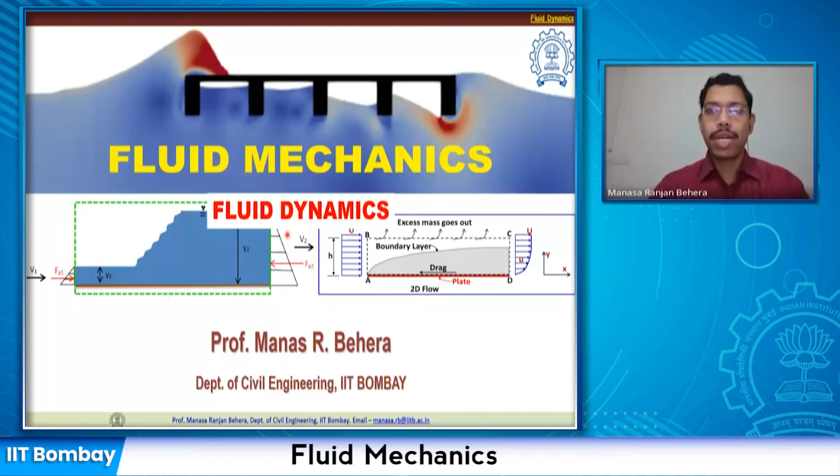So in the last lecture of fluid dynamics, we discussed various aspects of Reynolds transport theorem. We derived how it is linking the system and control volume approach, as well as we also discussed the linear momentum equation that has been derived based on the linear Reynolds transport theorem, and we also saw various applications of the linear momentum equation. So in today's lecture, we will see equation of motion for real and ideal fluids. We'll also see Bernoulli's equation and how it is applied to various problems.

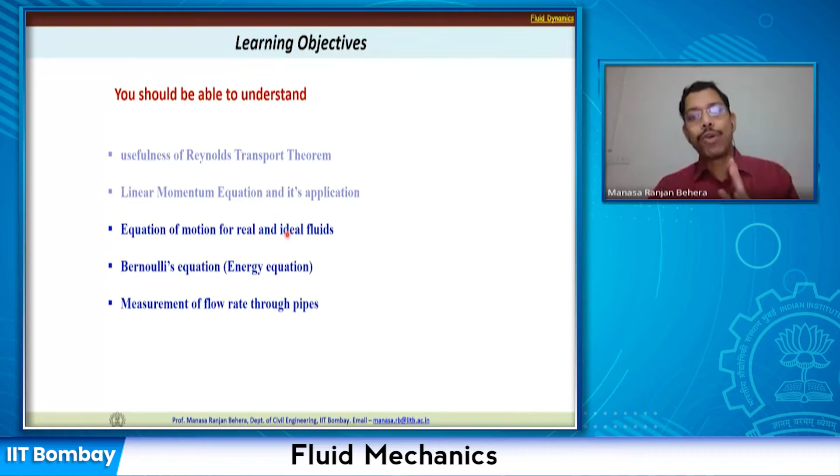Now, when we talk about equation of motion, basically it is the law of motion. So the moment we talk about law of motion, we remember Newton's second law, which says that force is equal to mass into acceleration. We have already seen how the total acceleration is derived based on temporal as well as convective accelerations. Now mass is the mass of the particle or the fluid element.

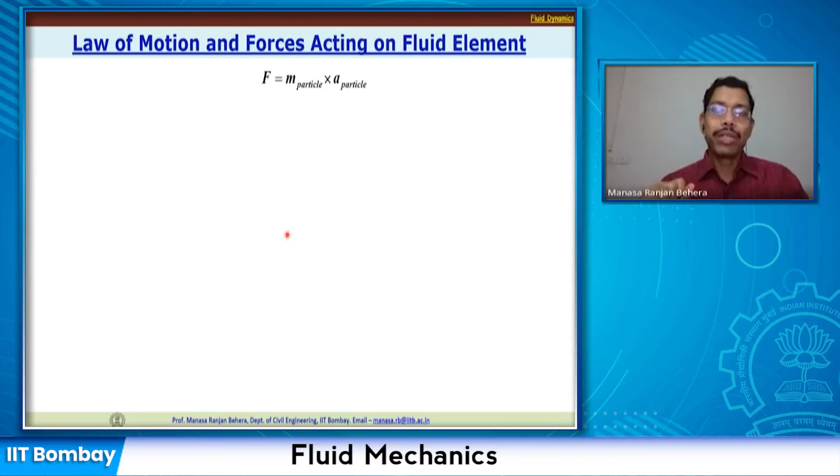Now what are the different forces that are going to act on the fluid element? If we look at the forces that are influencing the motion, the major forces that are going to act are gravity or the body force. Then there is a pressure force, which is fluid pressure. Then there is molecular viscosity or the viscous force. We have already seen how the viscous force acts, and tau is equal to mu du by dy, so viscosity is going to play a major role.

In addition to that, there is a surface tension force which is going to act. Due to compressibility, there will be some force. When there is turbulence, there will be Reynolds stress generated, and that is also going to act on the fluid motion. So all these 6 different forces can be broadly classified into 2 categories: body force or surface force. Those acting within the body we take as body force. If something is acting on the surface, we call it a surface force.

Now among these 6 different forces that we have listed here, we are not going to consider some of the forces right now, because right now we are not talking about turbulence. So right now we will not consider the Reynolds stress. It will come only when we talk about turbulence. So the effect of turbulence is not in picture right now.

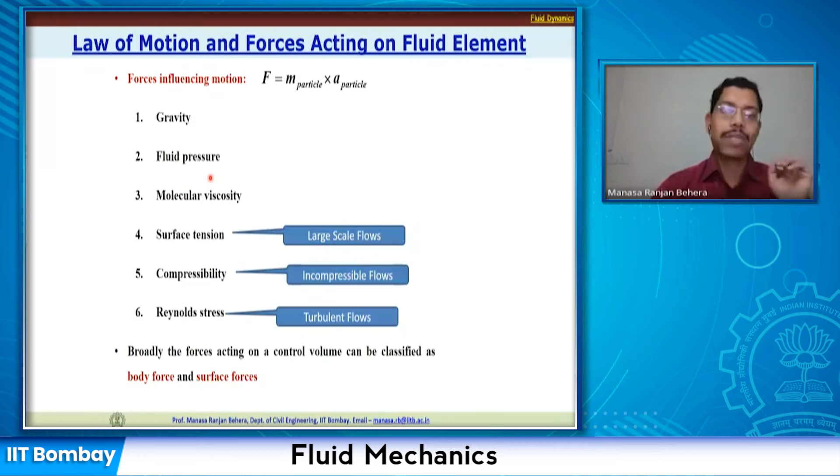Okay, now let us look at these forces. Let us take a fluid element first, having dimensions dx, dy and dz. This fluid element is going to have all these forces acting on it. As we have already discussed, there is the gravity force, that is the weight of this fluid element. If we take vertically downwards, the weight acts vertically downwards. So volume multiplied by unit weight will give you the weight of the fluid element.

Now what is the next force? There is a pressure force which is acting on the surface. Here you can see I have shown Px, which is acting in the x direction. The pressure is acting on this face, which is nothing but dy dz, and there is a pressure Px acting on the left side of the face.

Similarly, on the opposite side there will also be a pressure acting. If that pressure is Px here, over a distance the pressure would have changed, and the rate of change is dou Px by dou x. So over a distance dx, the change is dou Px by dou x multiplied by dx. So Px plus this component is the pressure which will act on this surface. Now, I think there is a mistake here. The pressure should be acting towards the fluid element.

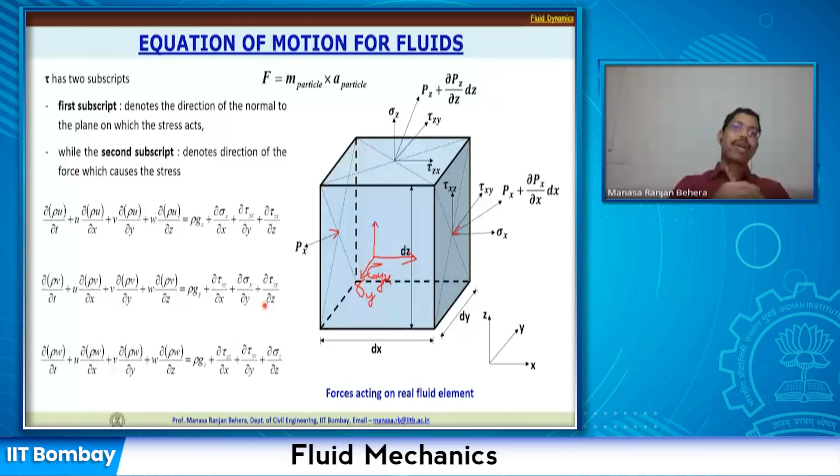So we have 9 unknowns, and you know that you need to have as many equations as the number of unknowns that you have. So if you have 9 unknowns, you need 9 equations, but we have three equations. So if we can convert or represent these unknown terms in terms of u, v and w, then our problem will be simplified. We can reduce the number of unknowns. So that's what we are doing here.

We have this tau that is represented in terms of u and v. Similarly, sigma is represented in terms of pressure as well as velocities. So now these 6 unknowns we have represented using 4 unknowns. So already 3 unknowns, same u, v, w. So additional 1 unknown is still remaining, that is pressure. So right now altogether in the equation we have 4 unknowns, u, v, w and pressure.

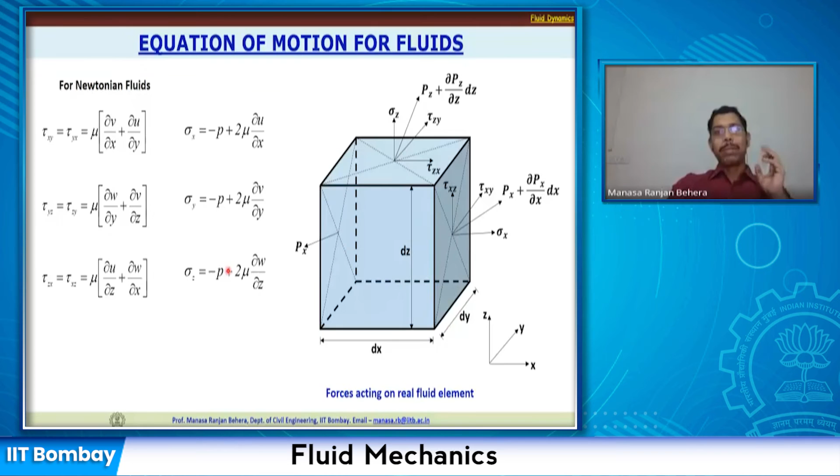So now let us write down this new equation, substituting these values of tau as well as sigma. Okay, so this is my equation in the x direction. I have written the equation in x direction. Let us look at that.

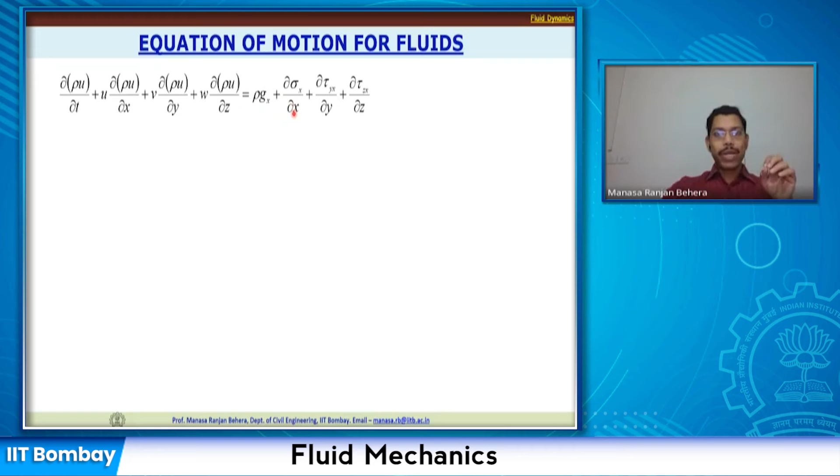So we had this equation, that is dou rho u by dou t plus u dou rho u by dou x plus v dou rho u by dou y plus w dou rho u by dou z, that is equal to rho gx plus dou sigma x by dou x plus dou tau yx by dou y plus dou tau zx by dou z. Now in this, let us just pull those equations which we had already written for the tau as well as sigma.

Now if I take the first term, that is sigma, I can write down sigma x equals minus p plus 2 mu dou u by dou x. Similarly, I can substitute the value for tau yx and I will take that from here, and again for tau zx I'll take the value from here. Alright, so let us write down. I'm not writing the left hand side, I'm going to write only the right hand side and see how we can rewrite the equation.

So if we look at, you have this rho gx here. Now if you substitute sigma x in terms of minus p plus 2 mu dou u by dou x, you can write down minus dou p by dou x plus 2 mu dou square u by dou x square. Alright. Now similarly, let us substitute the term tau yx. What is tau yx or xy? That is mu times dou v by dou x plus dou u by dou y.

Now if I substitute mu dou v by dou x into dou by dou y, I get mu dou square v by dou x dou y plus mu dou square u by dou y square. So now by substituting tau zx, I can write down mu dou square u by dou z square plus mu dou square w by dou z dou x. Okay, so this is the modified equation that we have now.

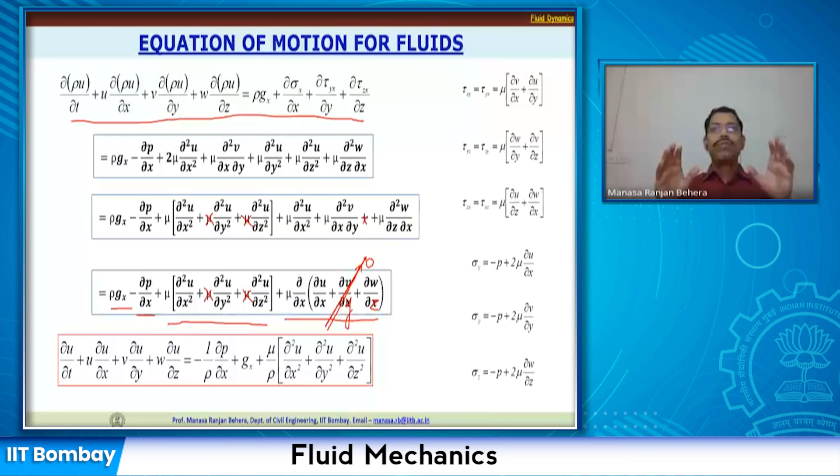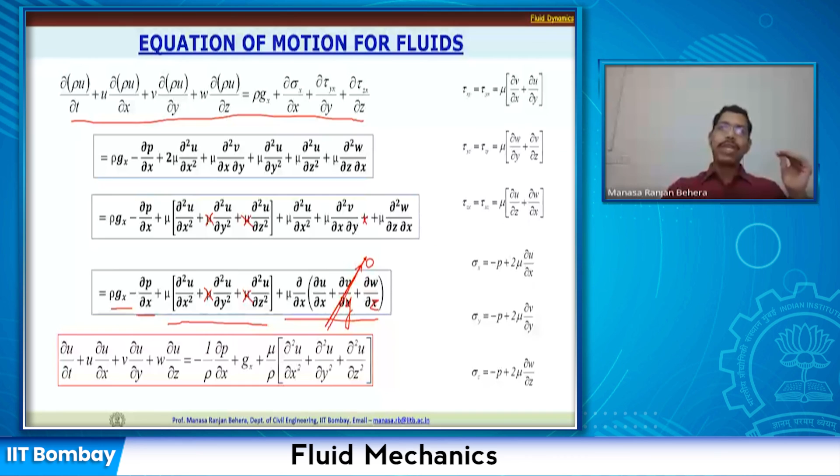Now, once we have derived this, let us look at a compact form and at the expressions in all different directions. What we have derived is for the x direction alone. In the x direction, this is the equation which we have already derived. Now, in the y direction, the change, if you observe, is ∂v/∂t. Everything remains same, only the u changes.

So ∂v/∂t + u ∂v/∂x + v ∂v/∂y + w ∂v/∂z = −(1/ρ) ∂p/∂y, the pressure gradient in the y direction, and the body force in the y direction. And here we are writing the viscous force. In this viscous force, all the other terms remain same except the velocity v substitutes the u that has been used here.

So ∂²v/∂x² + ∂²v/∂y² + ∂²v/∂z². Similarly we can write down the expression in the z direction. So all three equations are the equation of motion. Now if you finally look at this, we have three equations and four unknowns: u, v, w and pressure.

We know the density, the viscosity of the fluid, the gravitational acceleration, but what we don't know are the velocities and the pressure. These are unknowns. So we need one more equation to solve the four unknowns. To do that, we add the continuity equation to get the full set of equations. This set can be used to solve the four unknowns for any fluid flow problem. And this is nothing but your Navier-Stokes equation.

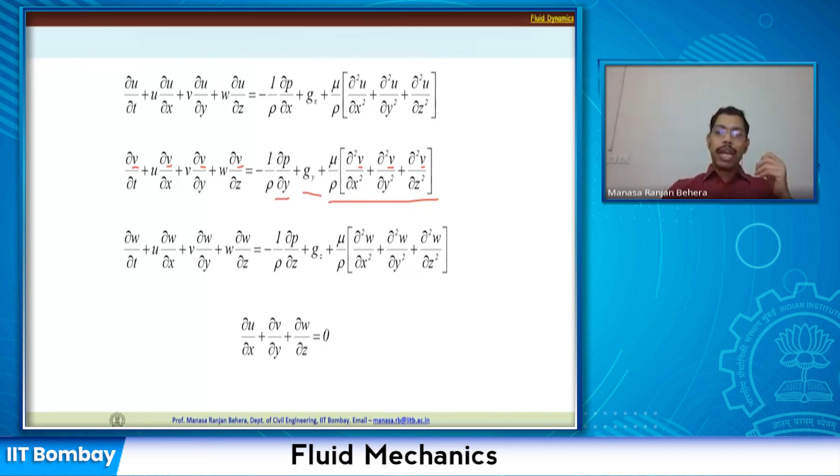So the Navier-Stokes equation has been derived to solve fluid flow problems. We have considered the body force, the pressure force, and the viscous force. So to note it down, the Navier-Stokes equation does consider the viscous effect of the fluid. And the moment we say the fluid is viscous, we are telling that the fluid is a real fluid. So the Navier-Stokes equation solves real fluid flow problems.

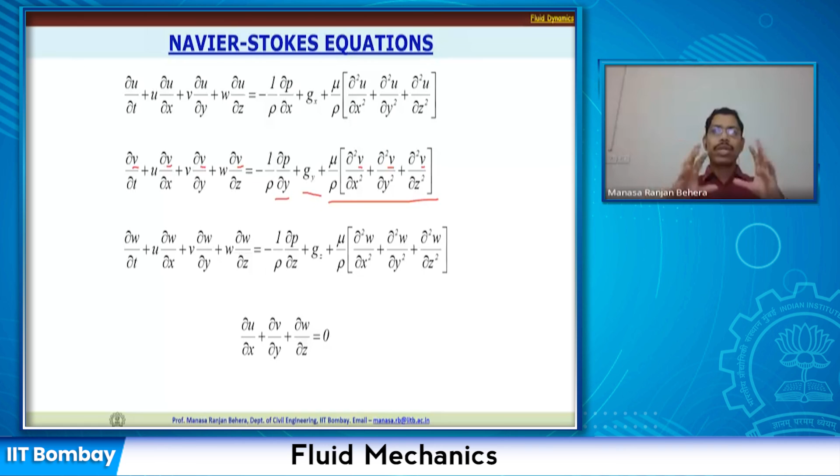We have already seen earlier the difference between ideal fluid and real fluid. The moment we consider the viscous effect, we are talking about the real fluid flow scenario, and the Navier-Stokes equation is capable of solving that. All right. Now, having understood this, we can slightly compact this whole set of equations to quickly remember it.